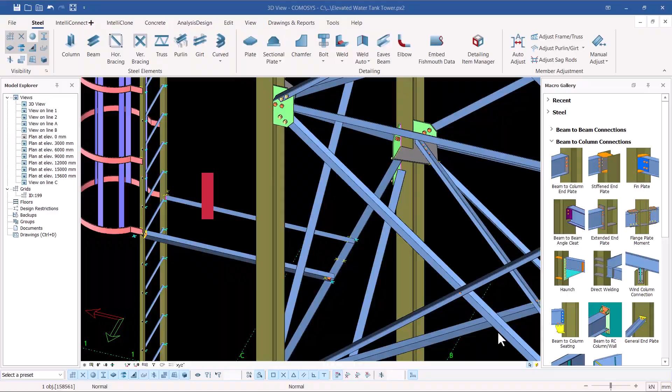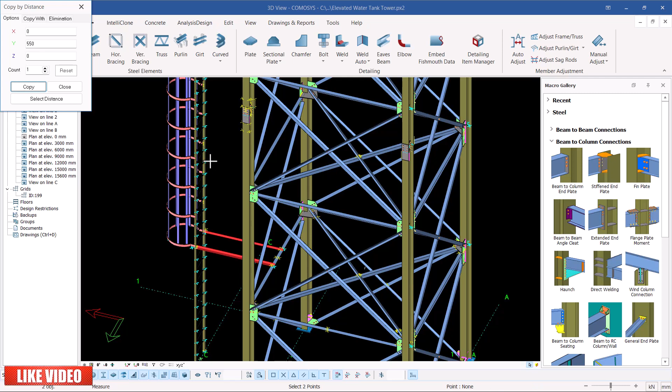Welcome back. Now we want to populate or copy this at an interval of 3 meters in support of this cage ladder against our main structure of the elevated water tank. I'll select this member and that member, then right click and go to Special Copy, pick on Linear. The axis we'll be working on is the Z axis, because we are moving positively upward.

Then I'll feed in the 3 meter interval and count how many we need. We need 1, 2, 3, and probably 4. Since we have 1 in place, we will need 3 more of them. If I click copy, we'll have them in place.

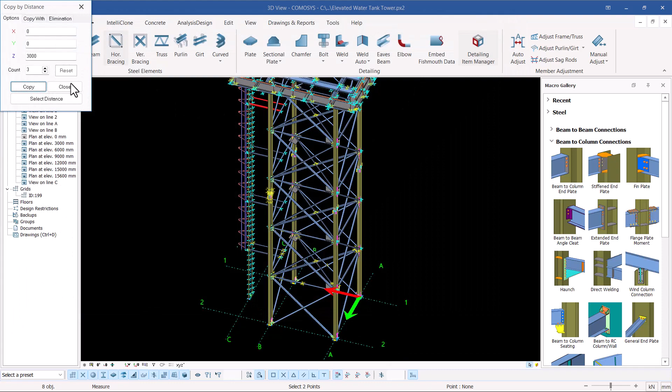So if I close that and go back and check if any part is missing, we'll be able to rectify it. If you come here, we don't have the plates. The reason is we didn't select the plate, so I'll click undo.

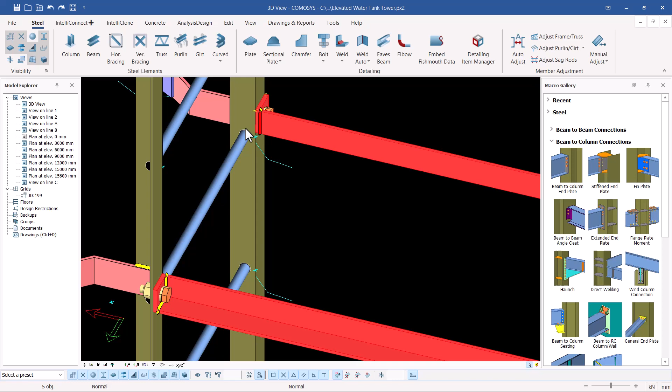Once I've undone that, I'll select these members and select the plates right there. Once I've done so, I'll go back and follow the same process, and this time everything will be in place. Let me increase that to 3 and click copy.

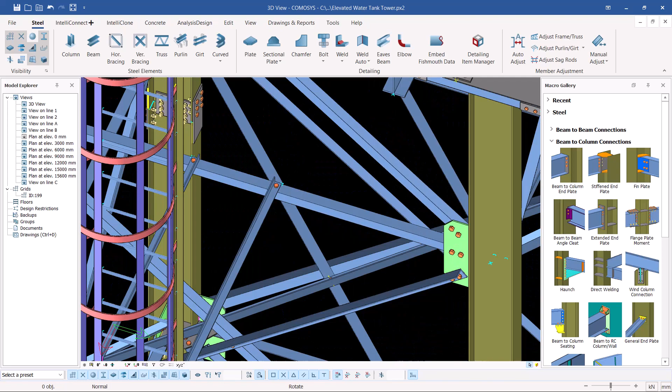Once done, close and switch back to the far end here and turn that round. If you take a closer look, you can see we have a member well supported to our main structure. You can see that the last support is this one. You can turn that round and have a look.

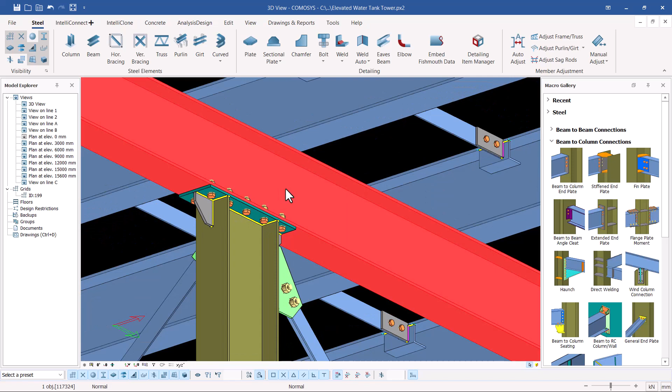So it's fully supported. If I turn this round and come here, you can see on the secondary beam here we want to add a stiffener that will reduce some strain on this secondary member.

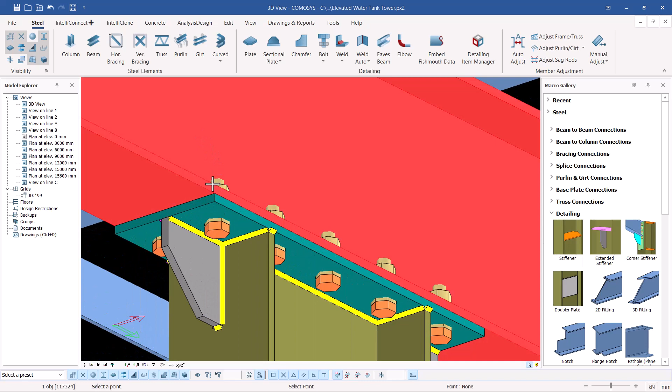So what we're going to do, I'll minimize that and come here to Detailing, then come to Stiffener, pick on the stiffener and pick the part I want to stiffen. I want to snap at the end here. I'm going to press control and snap at the edge of this member, then click right there.

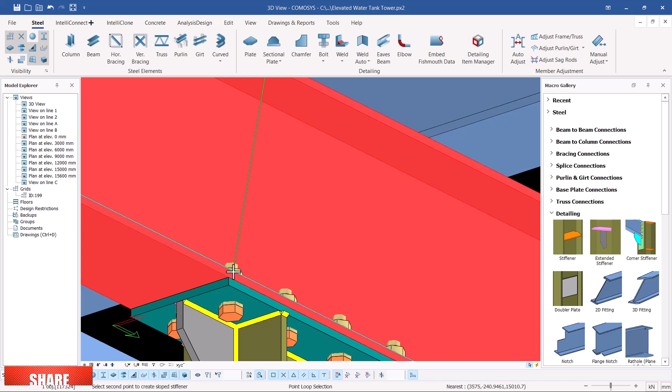Then go the other end and press control and snap on that spot. Right click and come to Special Copy. But this stiffener is not well placed.

So what we're going to do is select it, then delete that, then pick the right one. I'll select it, then pick it. We'll go back and use the same tool, pick on it.

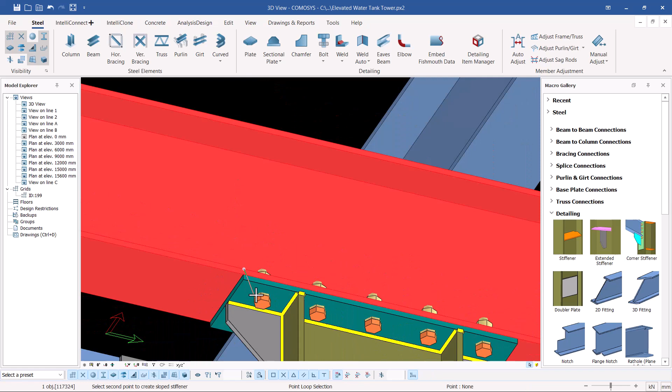Now we follow the process: select the point. I'll select a point here, then select the second point. I'll come on top here, press control, and select a point. So I've selected a point right there, but you can see my stiffener is not perpendicular, somehow inclined at a particular angle.

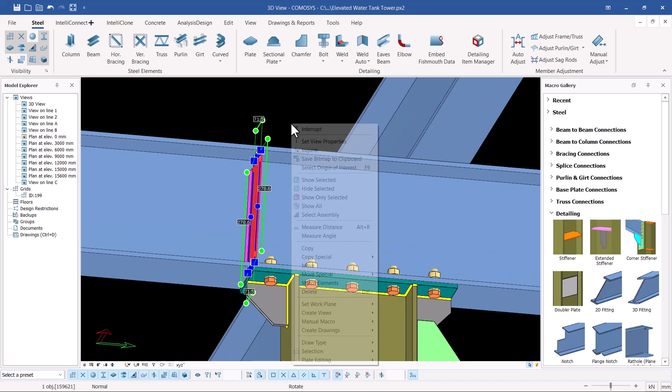At a certain angle, so let me just delete that. And now I want to define my locations using points so that this will be accurate.

I'll come to Edit, then Points, pick on the points, and snap right there to place my point. Once snapped, I want to copy this point upward. I'll come to Point, then pick Projected Points, snap at the edge, press control and mouse over the edge of that member, select it, then move to the other side and select it while holding control, then pick the point you want to project.

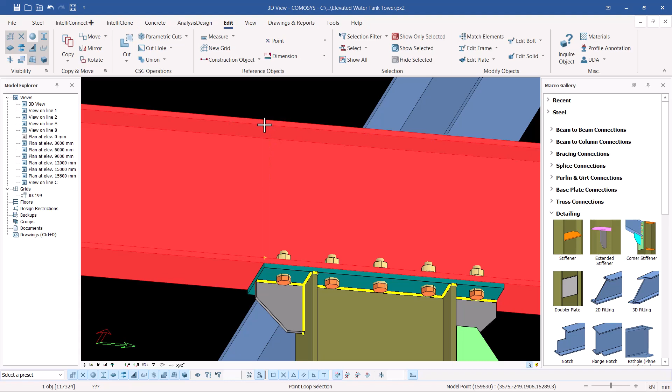So I have my point projected on that side. I'll come back here and pick this member and select that member, then pick my points for stiffener placement. You can see this time my stiffener is straight and not inclined at any angle. Maybe you are not happy with this kind of curved chamfer.

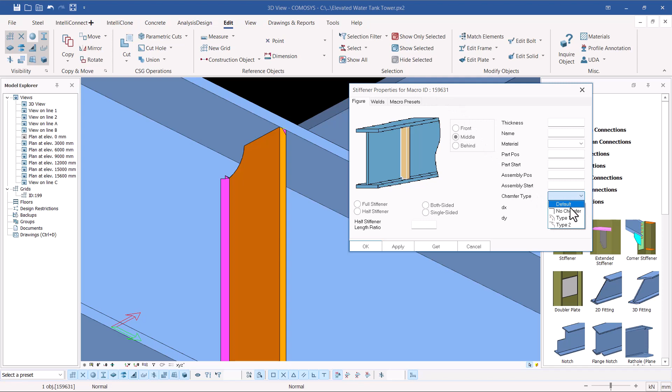Select on that member, then press M on your keyboard and enter once again to bring up the dialog box where you'll set everything. If I come to chamfer type, I'll pick the right one—type 1—click apply and give it OK.

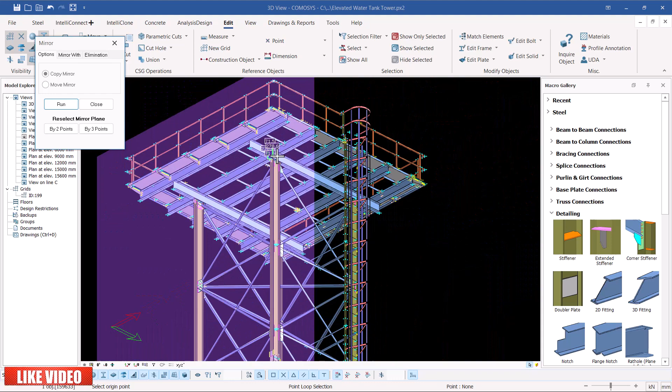Since we have this in place, you can mirror this to the other end: right click, come to special copy, pick on mirror, and make sure your mirroring is accurate. Let me zoom out and use the bottom end of this plate as my mirror line. I'll mouse over the edge to the midpoint of that plate and mirror it to that, then click run.

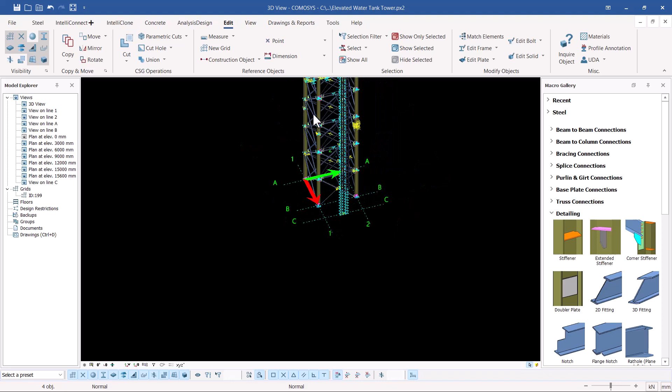If I close that and move on top here, I can check whether my stiffener has been mirrored on the other end, and exactly what's been done. I'll select on that, come to the bottom end, and mirror again—select, right click, come to mirror.

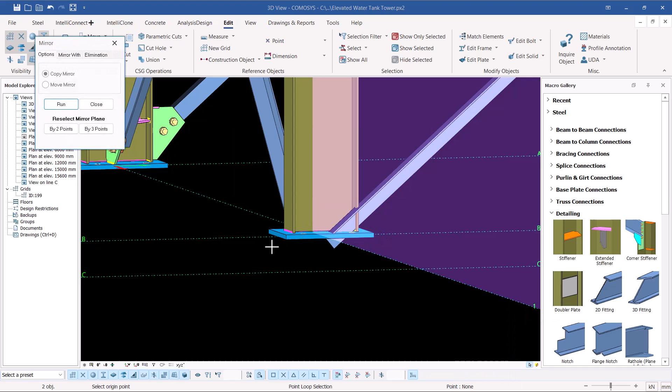Let me turn this around accurately so I can pick the points of mirroring. I'll right click, come to special copy, pick on mirror, and mirror this from this far end to this far end—this will be my mirror line for those stiffeners.

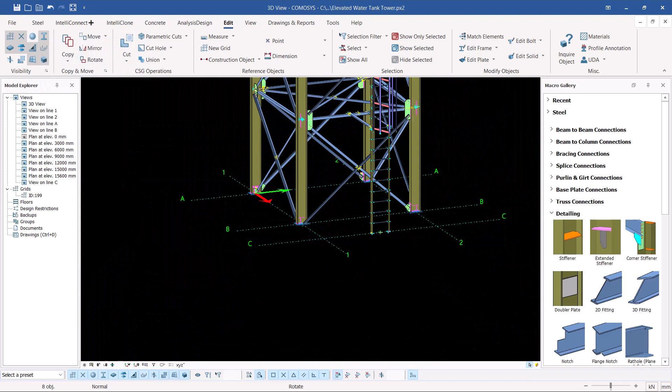If I turn it like that, come up here, select, and pick any component and turn it around, you'll see I have my stiffeners in place. I was just trying to show you one thing: the moment you create a stiffener on one end, automatically another one appears on the far end.

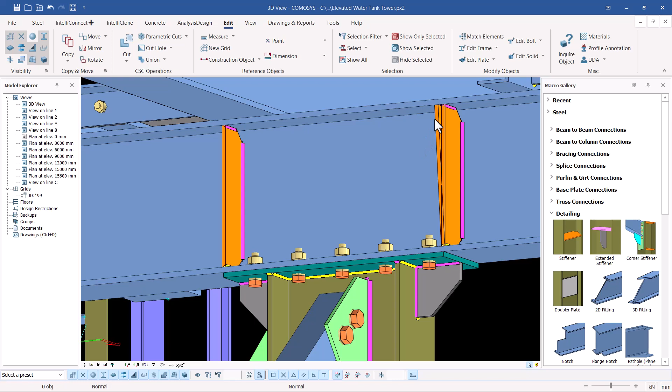Let me first delete the previous one we created that contained errors. Once I've done that, I'll be able to select it properly.

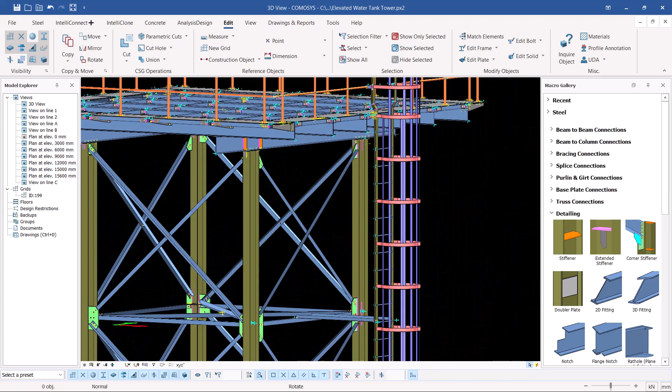I'm going to pick on this, pick on that, and right click—or I'll just copy it manually: select on that, right click, select on that, then press and hold your right mouse button and move the cursor to copy it, then rotate that.

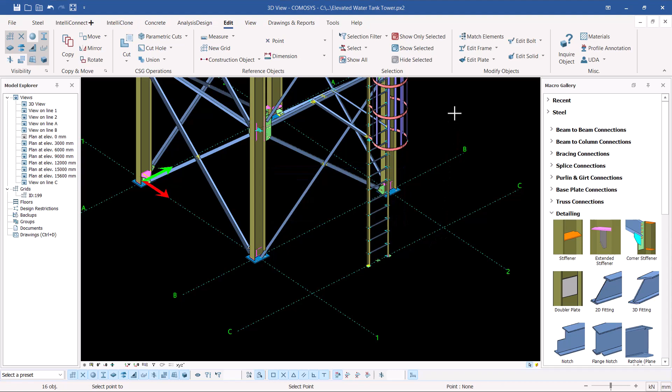Let me come to copy, and copy it from there to here. I've copied that. If I come back here and turn it around, the selection is still active, so I press Control and add this one also to my selection.

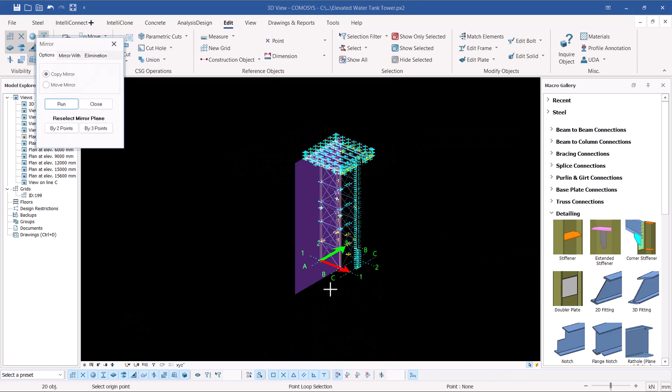Or you can select everything and select the stiffeners. Once selected, we'll come to mirror and define another mirror line from that spot to that spot, then click mirror run. If I close that, I can check whether my stiffeners are in place—and we can see they are accurately placed.

So that is done for the steel detailing for this particular elevated water tank. The steel detailing is complete.

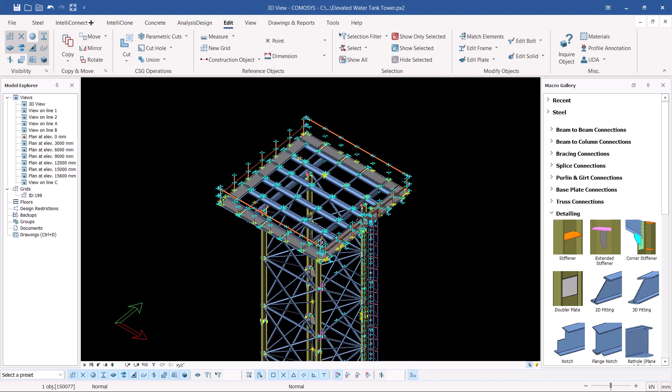Now let me first disable the points, and we have our model clean and in place. You can see that. If I turn it around, you can see that—have a look. We have our model completely finished.

Now the part remaining is the RC section, the column bases for our structure. We'll deal with that in the next presentation.

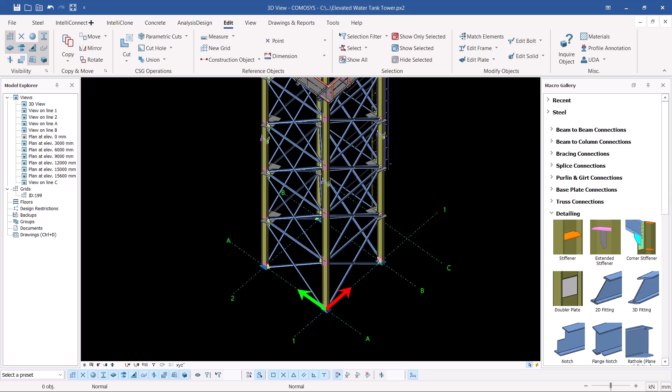Now the next step is the placement of column bases. Let's meet then. Bye bye.